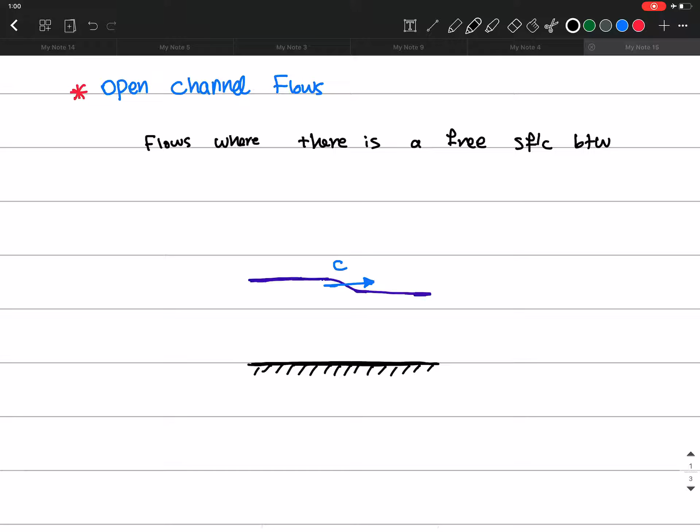Hello everyone. In this lecture, I'm going to start the open channel flows section. Open channel flows are flows where there is a free surface between the liquid and the gas, or water and air. These are mostly the fluids we investigate in civil engineering. For example, when you have a channel or a flume, this is where we have a free surface, a free interface between the water and air. So this is the definition of open channel flows: flows that occur in open channels, where the top of the channel is just removed, and we have a free surface between air and water.

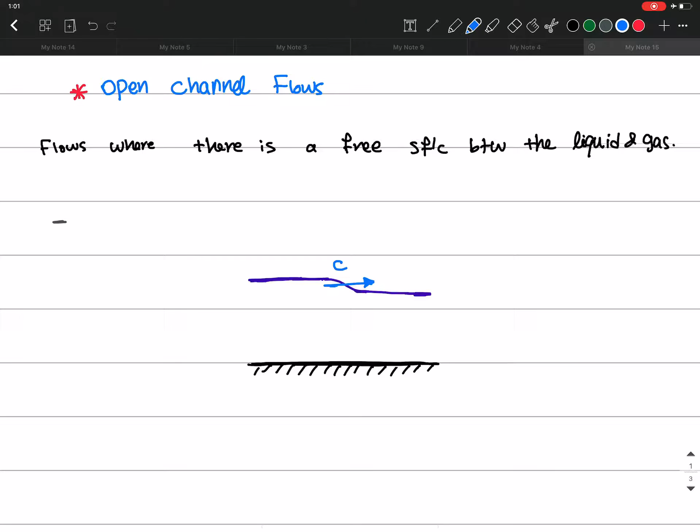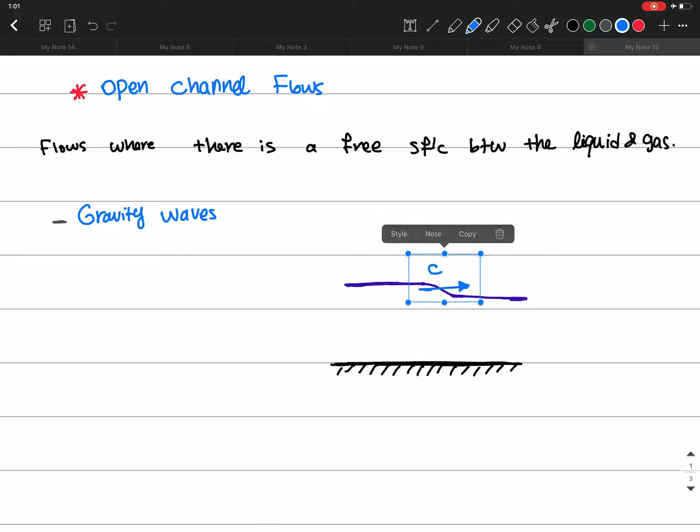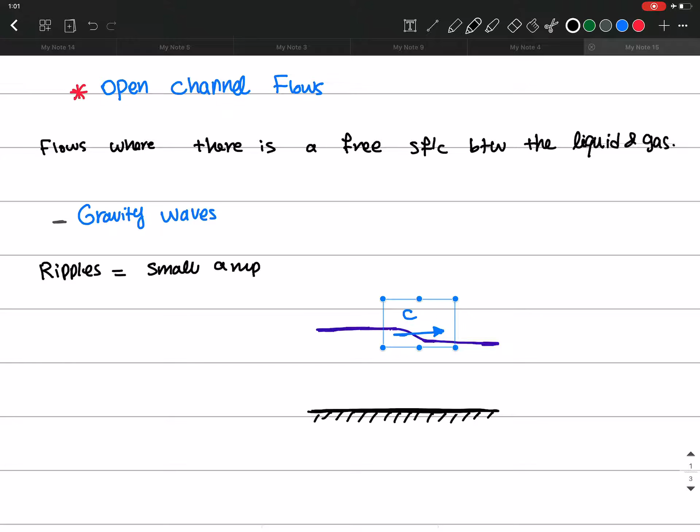So the first thing I want to investigate in these open channel flows is what we call gravity waves. And in particular, I'm going to focus on ripples, and let's see what ripples are. Ripples are small amplitude gravity waves, so we only focus on these small amplitude waves.

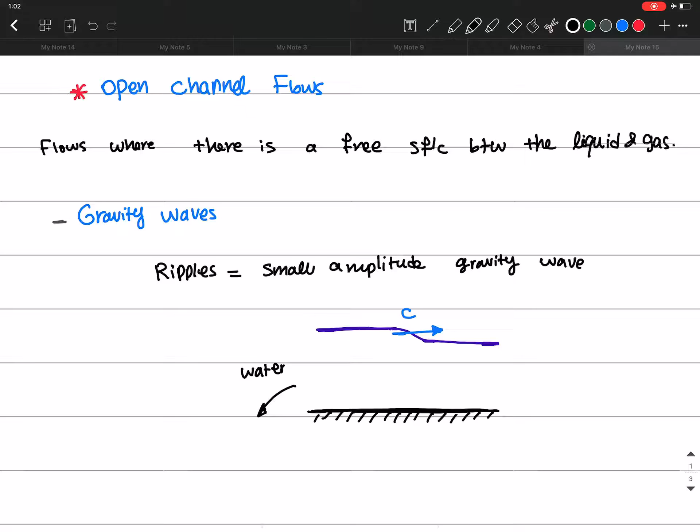So here, for example, you can see we have water. At the left, we make a small disturbance in a channel, in a shallow open channel flow. We have water on top of the channel, the velocity of it is 0, it's steady. And then suddenly we make a small disturbance in this shallow open channel flow. The disturbance could be, for example, you put a stick here and just shake it, or do some disturbance.

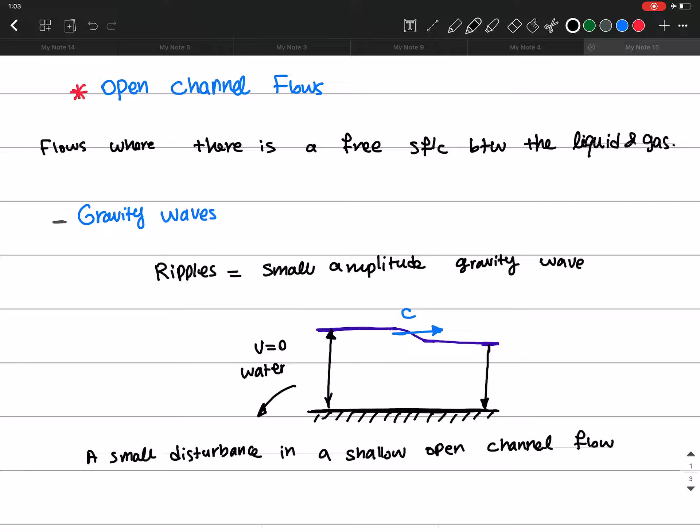So what happens by the disturbance is that a ripple is formed, and this ripple moves toward the other side of the channel. Downstream of that disturbance, where it doesn't know anything about the disturbance yet, the depth of the channel is y, and upstream of the disturbance, the depth of the channel is y plus delta y.

And in ripples, because these are small amplitude gravity waves that are moving, the requirement we have is that this delta y, the amplitude of the wave, over the depth of the channel y, should be much smaller than 1. It's a small amplitude wave compared to the depth of the channel.

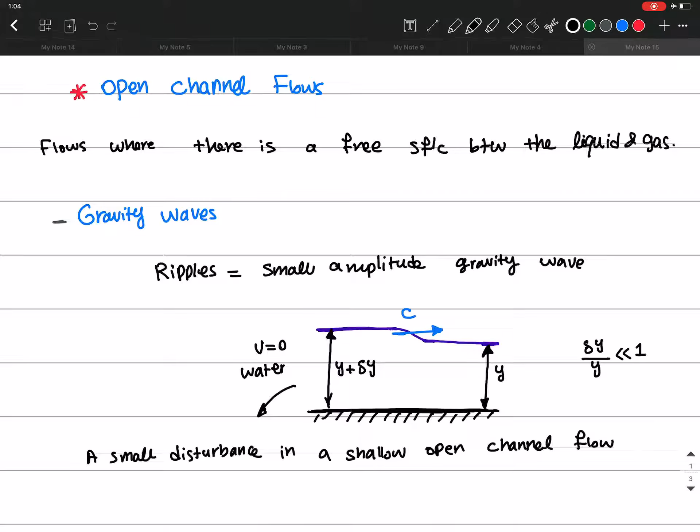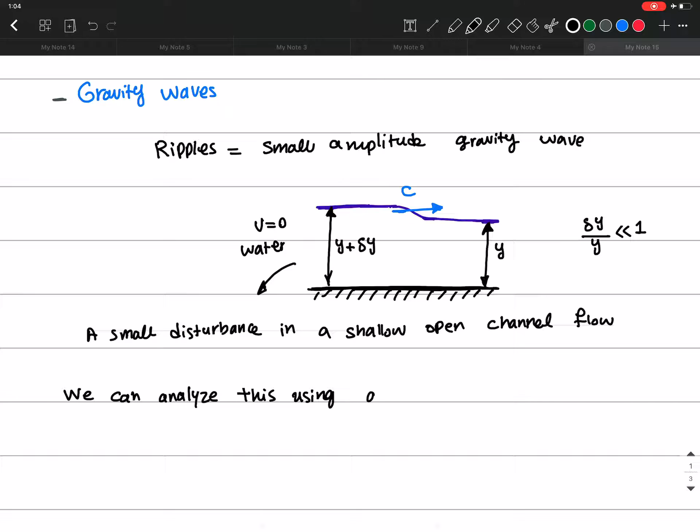So now we want to analyze this flow, these ripples, and see whether we can find a formula for the speed of the wave, this small amplitude gravity wave. We can analyze this using a control volume approach. Let's see how we can do this.

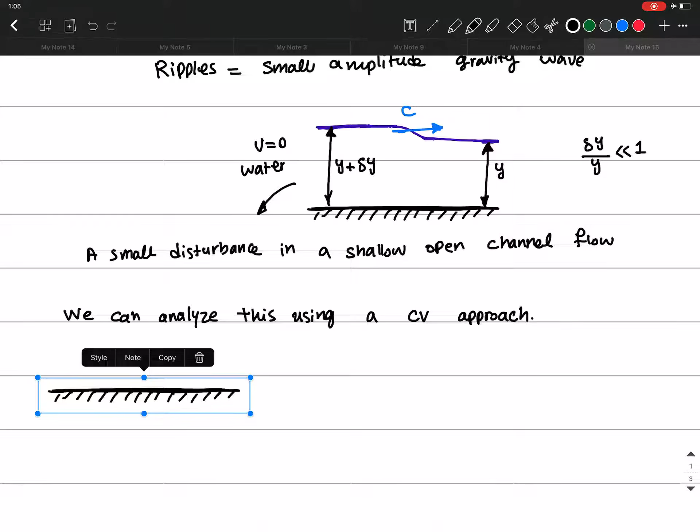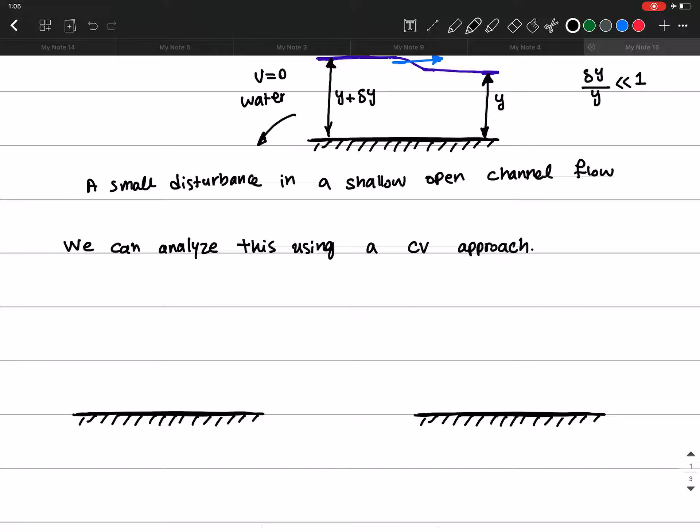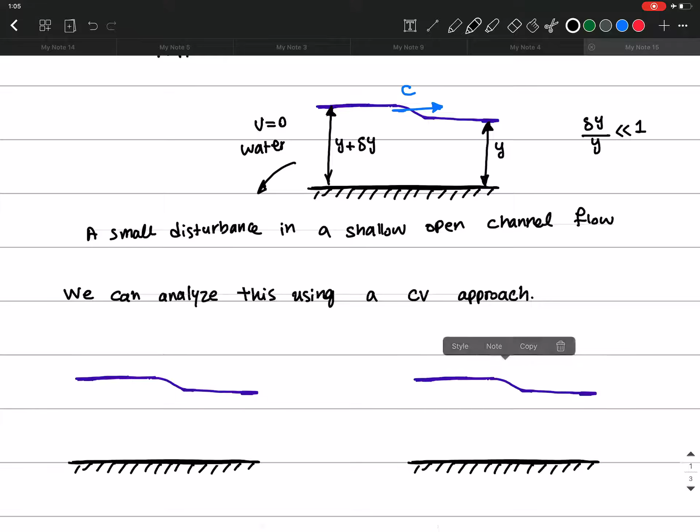So here we are going to use an innovative approach. I'm going to talk about the way we are going to analyze this, and the control volume that we are going to consider. First, I'm going to talk about the traditional way of doing that, and then a new way we are introducing here that simplifies our equations.

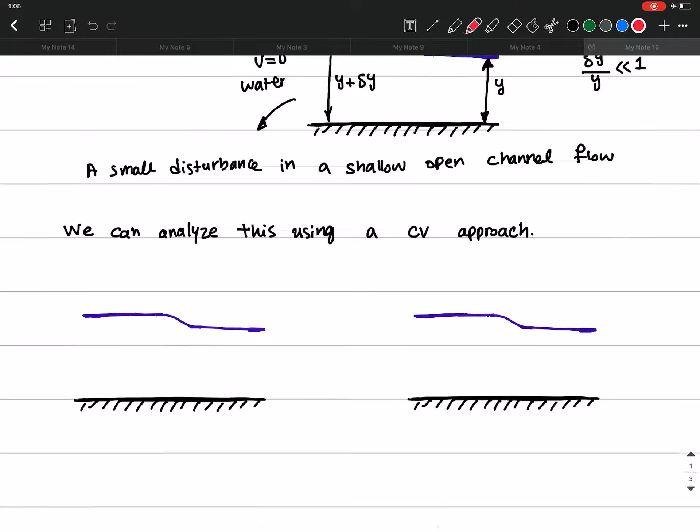So in the traditional approach, what we would do is consider a fixed control volume in space, steady, time invariant. This is our control volume. Here we have y plus delta y, and here the depth is y.

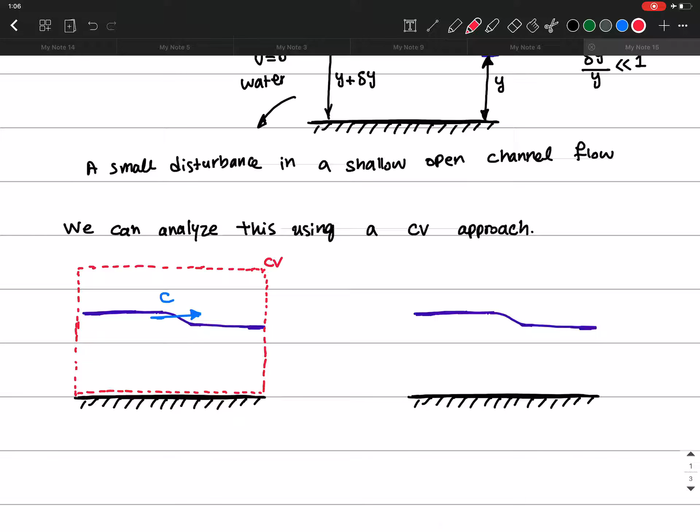So the velocity at this section is 0, right? Because the flow is not feeling anything about the disturbance. However, here we might have some velocity because of this disturbance, which we call delta V. This is known as drift velocity.

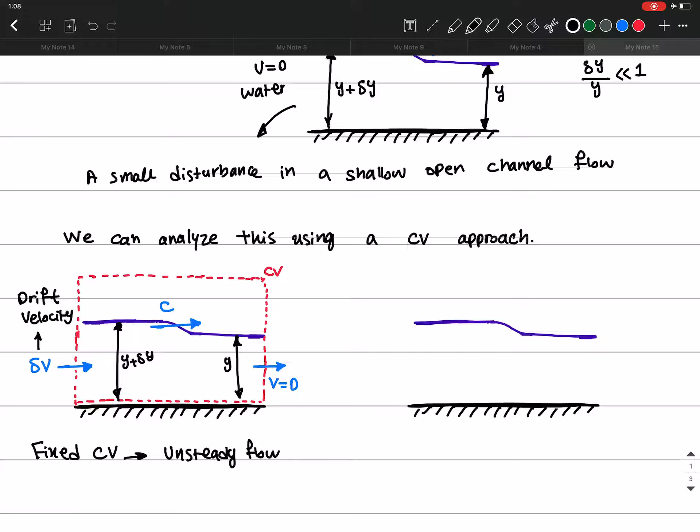So this is a kind of traditional control volume. Here we have a fixed control volume in space, but the flow is unsteady, it's moving inside this control volume and changing its shape. We know that this drift velocity is typically much smaller than the speed of the wave.

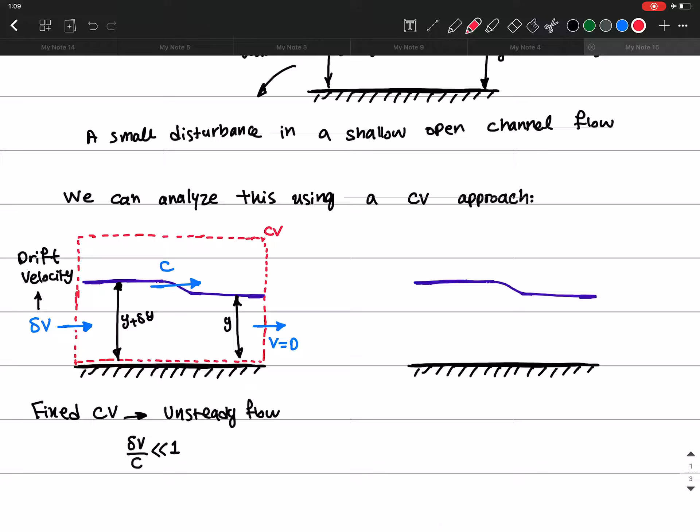So if you want to do this, because this is unsteady flow, it's kind of complicated, but we can simplify our approach if we define the CV differently. The way I'm going to define the CV is that we are moving with this wave. So this CV is not a constant CV, it's actually moving with the wave speed c. It's like you are on this wave, moving out over it, like an ocean wave that surfers ride. You are moving with that wave, and you want to form a control volume around yourself as you move with it.

So now let's see what's going to be the difference here. Again, these heights are not going to vary, it's the same height. So the things that are going to be different are velocities, because now we are moving with the wave.

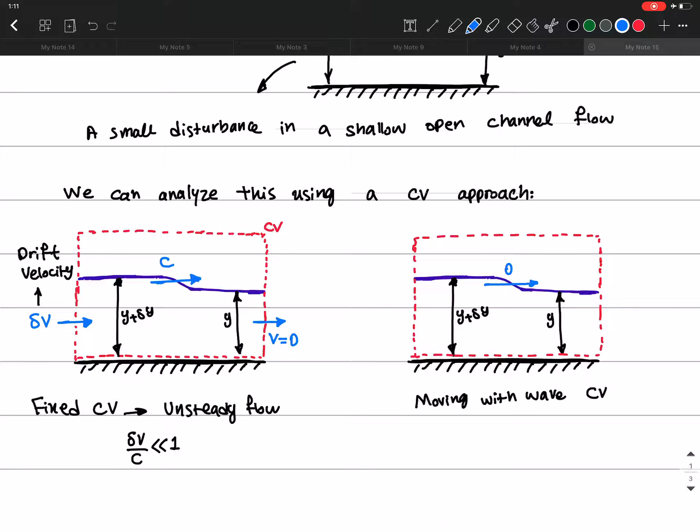So here, because we are moving with the wave, the velocity of the wave to us should be 0, right? Because we are in the reference frame where we are moving with that, so we are not actually feeling the velocity of the wave. But on the other hand, what we are going to observe is that the downstream of the flow is actually moving towards us. So here we have a V which equals C, right?

So it's not equal to 0 anymore, it's coming towards us. And on the other hand here, this is also going back toward the upstream, is kind of, we are leaving that, so it's like it has a velocity of C minus delta V. In other words, to simplify it, you just subtract C from all these velocities. So all the velocities that you have in a fixed CV, you subtract C, and then you are going to get these velocities here. To simplify that.

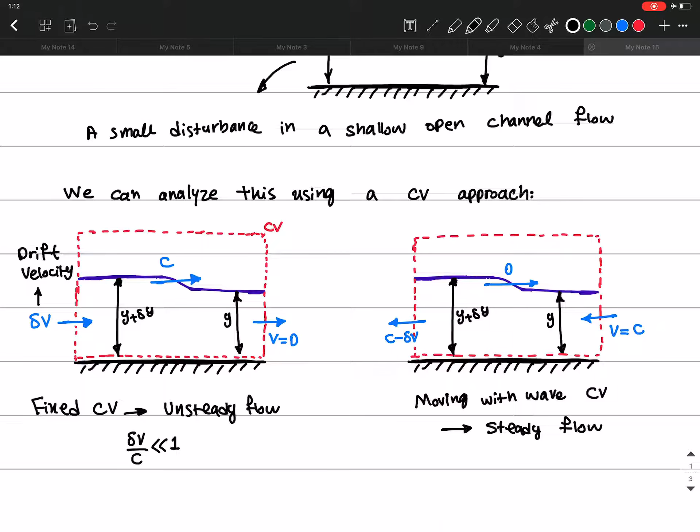Now, so we are moving with the wave CV. On the left, we had an unsteady flow, but now we are dealing with a steady flow, which is going to make our analysis much simpler. So the wave is stationary relative to yourself, but the water in front of the wave is coming at V equals C towards you.

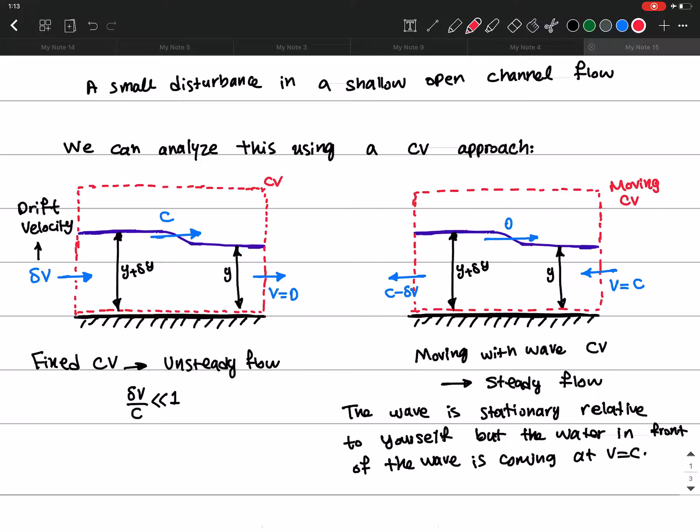Okay, so we are going to use this moving CV to continue our analysis. So I'm going to write the continuity equation first. So the flow that comes into this control volume should go out of this control volume. So the flow that comes in is here: C times Y, times the width.

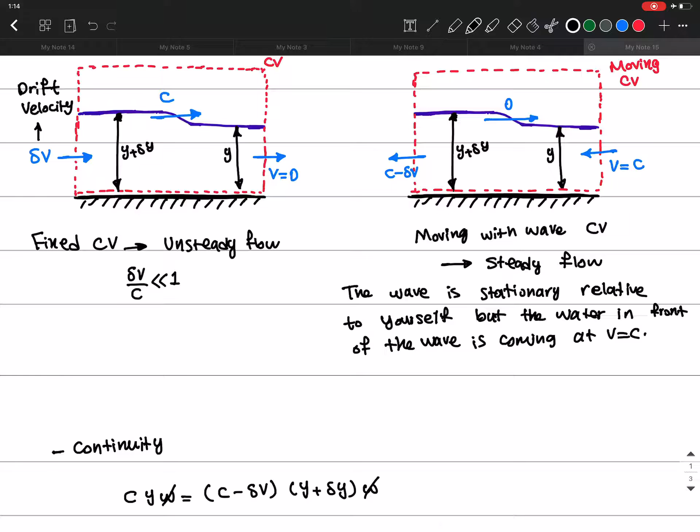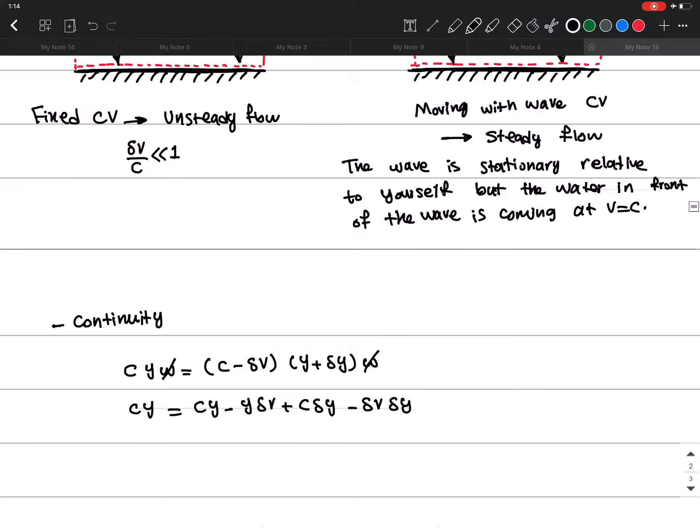We are going to assume that the width is constant, so I can write it down equals to the flow that goes out, so C minus delta V times Y plus delta Y, times again the width of the channel, which is constant here, so I can just cancel these two out. Then I can expand this, so I'm going to get CY minus Y delta V plus C delta Y minus delta V delta Y. And because these delta V and delta Y's are pretty small, if we multiply them, they are going to be even much smaller than the other terms, so I can assume that this is very small and equals to 0 compared to the other terms.

And also these two are going to cancel out. So what I am left with is this: Y delta V equals C delta Y. And this is what the continuity equation yields.

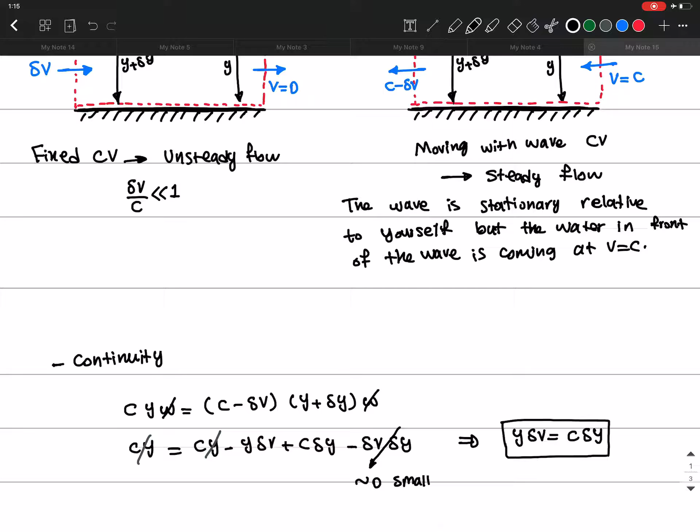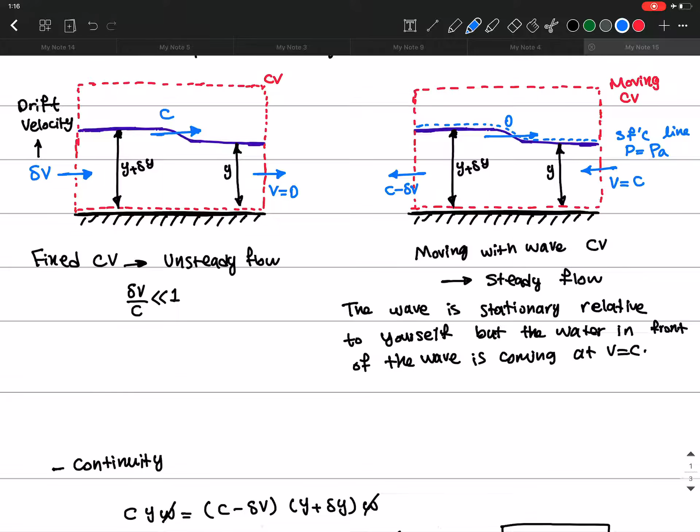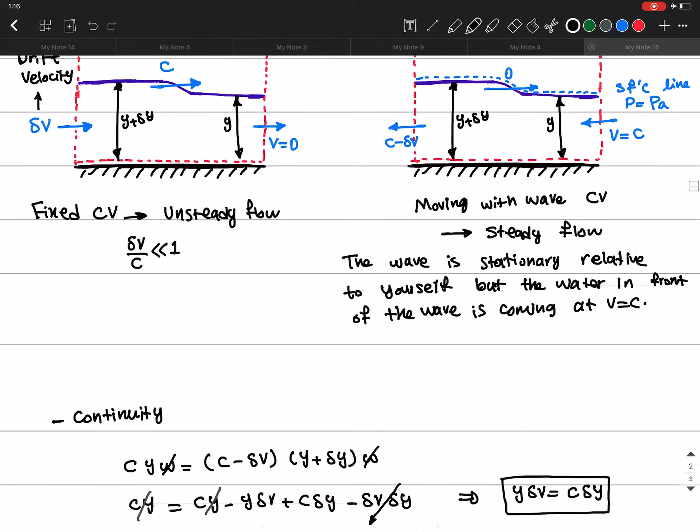So now let's write the other equation. Here, because we don't have any dissipation of energy, I can write the Bernoulli equation along the surface of this flow. Because this is the surface line, and along this surface line, this is in the vicinity of the atmosphere, the pressure here is just equal to the atmospheric pressure, PA, constant everywhere. So along that line, I can write the Bernoulli equation along the surface. So what we are going to get from section 1 and section 2 - say this is section 1, and this is section 2.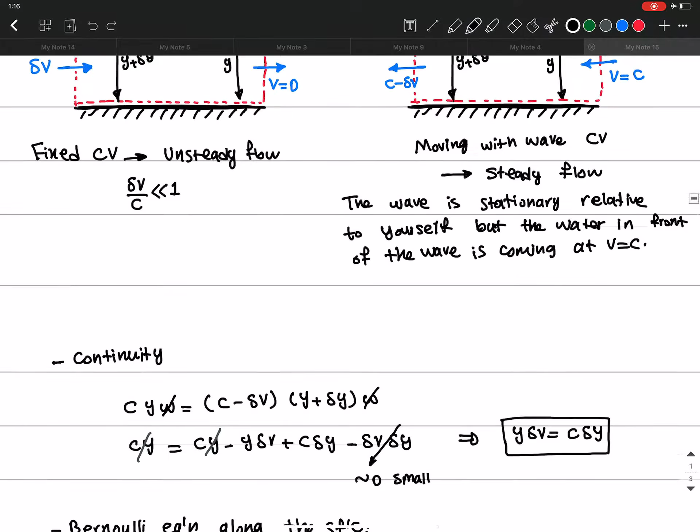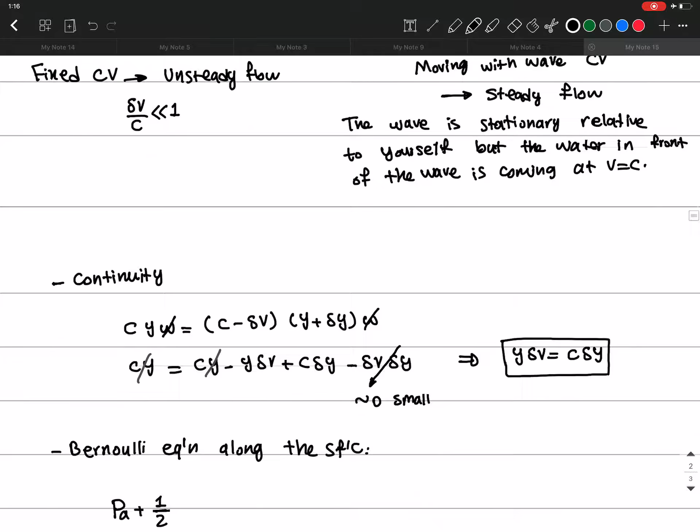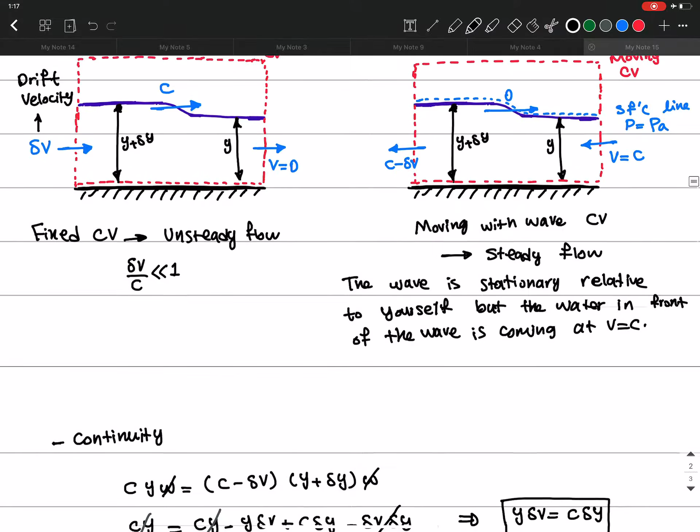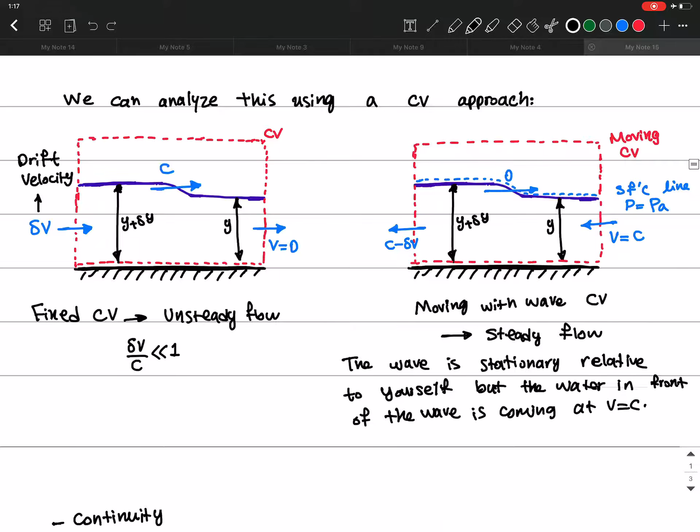So we are going to get PA, atmospheric pressure, plus 1/2 rho c squared, this is velocity here, plus rho gy. Because the flow is moving that direction, I can write it like this, so I can say this is section 1 and this is section 2. This equals to the atmospheric pressure at section 2, plus 1/2 rho times c minus delta v squared, the velocity here, plus rho g times y plus delta y.

So PA, atmospheric pressure, cancels out from both sides, and I'm left with these terms, and rho's also cancel out. So I'm only left with 1/2 c squared plus gy equals to 1/2 times c minus delta v squared plus gy plus delta y. So let's expand these: 1/2 c squared plus gy equals to 1/2 c squared minus 2 times 1/2 c delta v, which is just c delta v, plus 1/2 delta v squared, plus gy plus g delta y.

So these two terms, 1/2 c squared and 1/2 c squared, cancel out from both sides, and the gy's also cancel out. And this term, because delta v is very small compared to other terms, if you square that it's going to be even much smaller, so I can just neglect this, it's about zero. So what I get from the Bernoulli equation is: c delta v equals to g delta y.

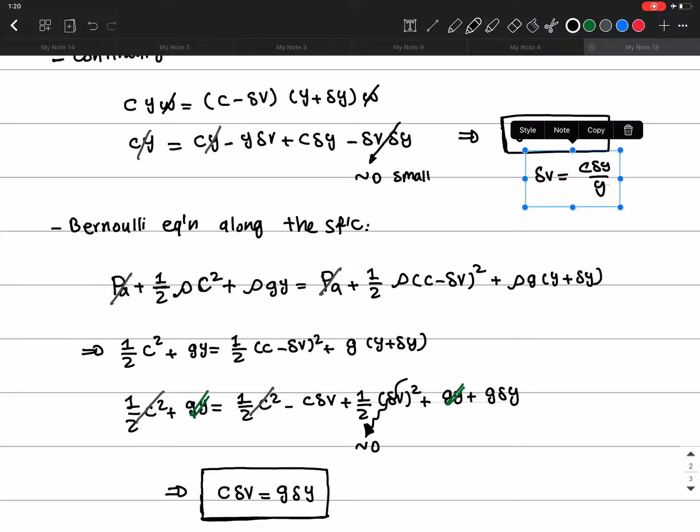So now we combine these two equations together. Instead of delta V, I'm going to write C delta Y over Y. So C times C delta Y over Y equals to G delta Y. So delta Y's cancel out from both sides, and we get a very interesting formula.

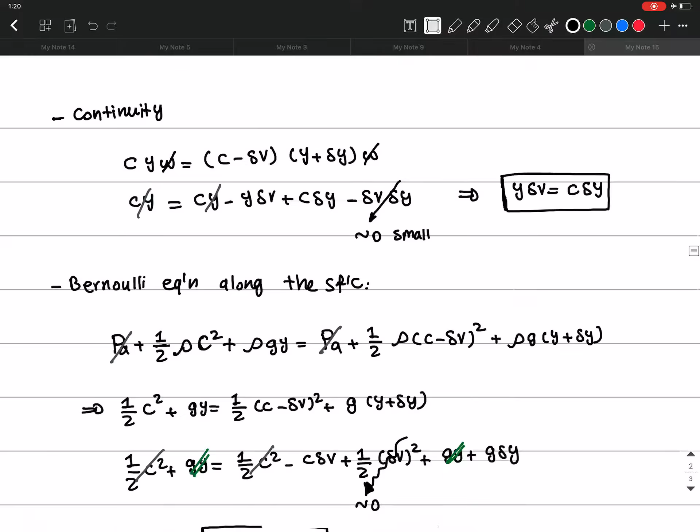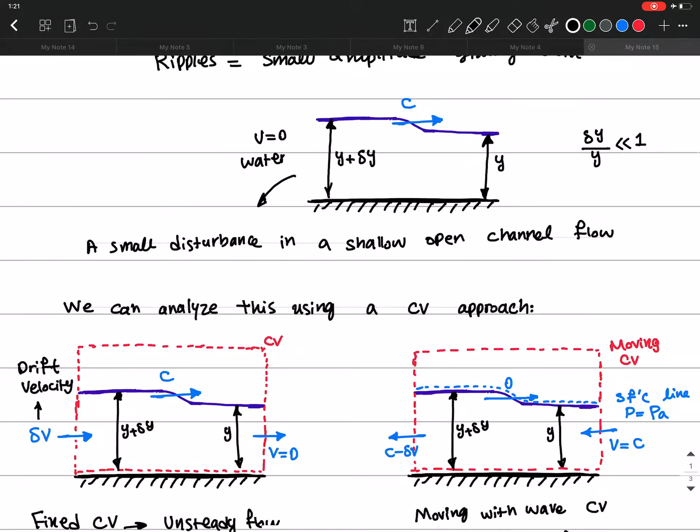Which is C squared equals to GY, or C equals to square root of GY. This is a very important formula. What C is, is the speed of this ripple, this small amplitude gravity wave. We were able to show that the speed is just square root of G, the gravitational acceleration, times Y, and that's why we call this a gravity wave, because it's driven by gravity.

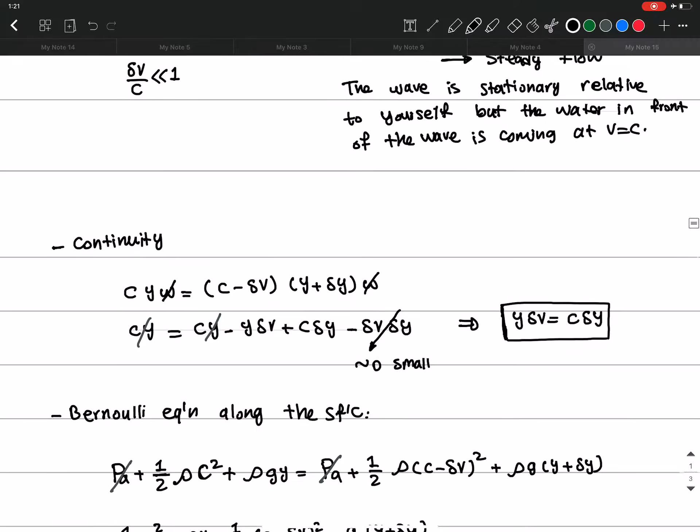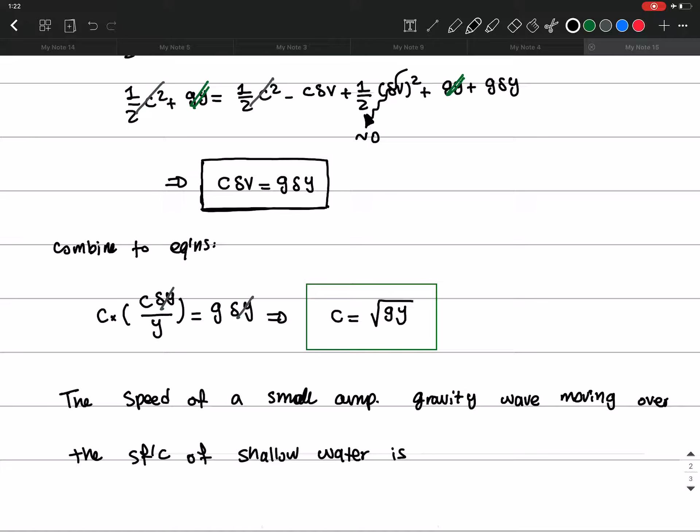So the speed of a small amplitude gravity wave moving over the surface of shallow water is square root of GY.

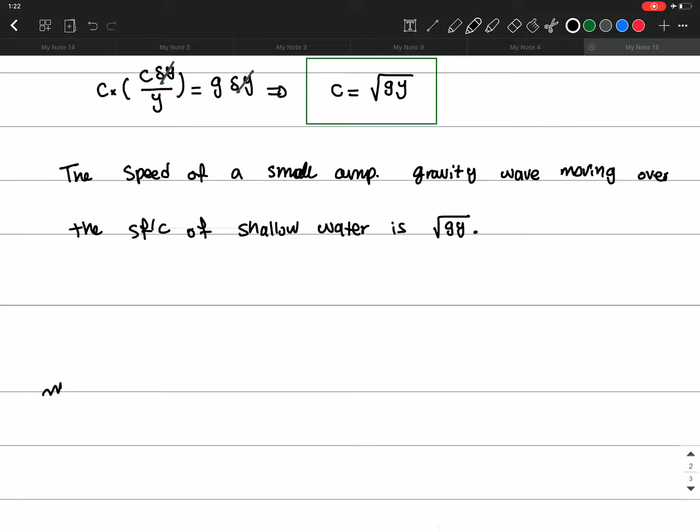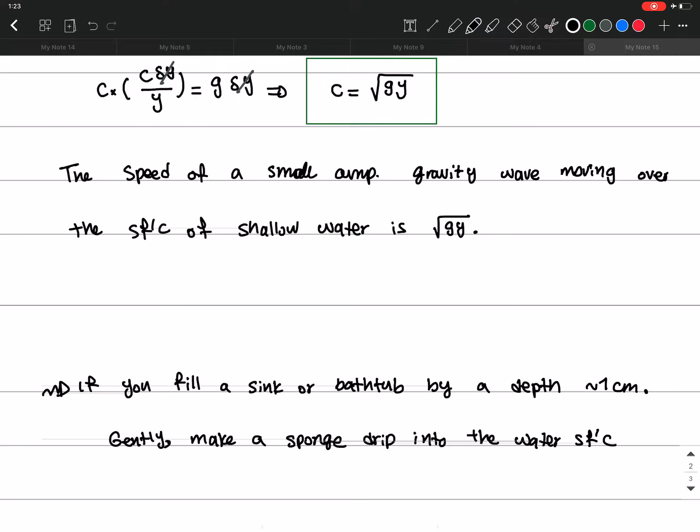You can actually measure this yourself and make sure you get the same formula. For example, if you fill a tank, or a sink, or bathtub, say to a depth of 1 centimeter, so it's kind of shallow water, fill that with water, and then gently make a sponge drip into the water surface. In this situation, you will see some circular ripples.

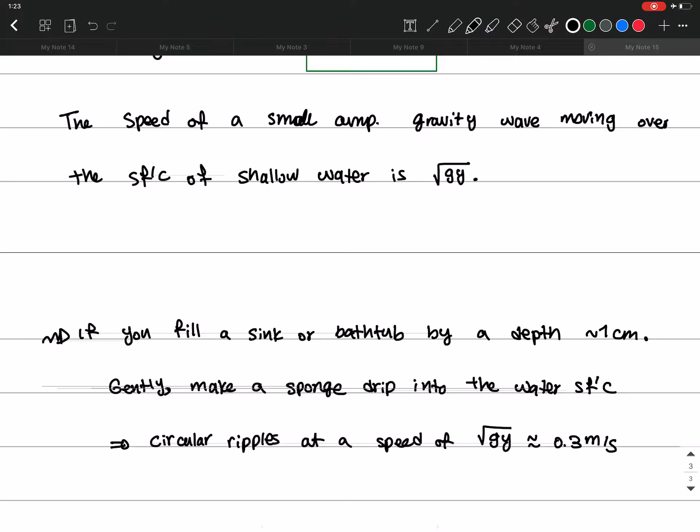Like even in lakes, you will see those circular ripples. These circular ripples move at the speed of square root of GY, which if you calculate for 1 centimeter is going to be around 0.3 meters per second. So you can actually measure this yourself and make sure this relation holds.

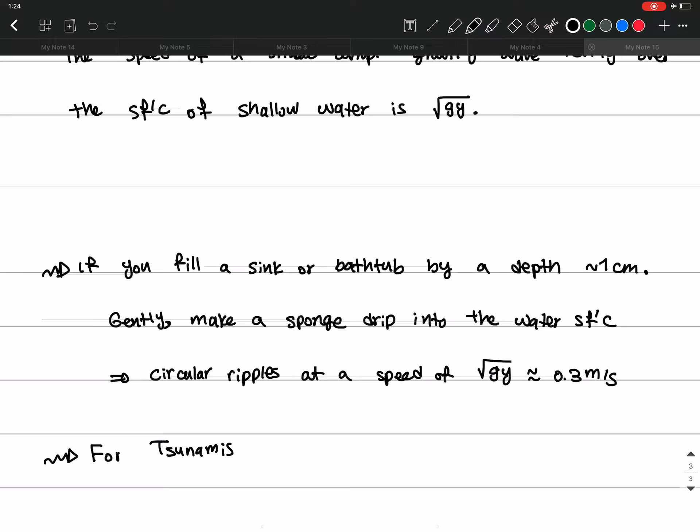Also for tsunamis, which are very large and dangerous gravity waves that occur because of some earthquake over the ocean, you can simply calculate the speed of that tsunami wave with this relation, square root of G, where we can assume it's 10, times the depth of the ocean. So you can say where the earthquake occurred, the depth of the ocean can be assumed around 4,000 meters, and this will give us a gravity wave speed of 200 meters per second. So tsunamis have very, very high speed and also high momentum as they approach the coast.

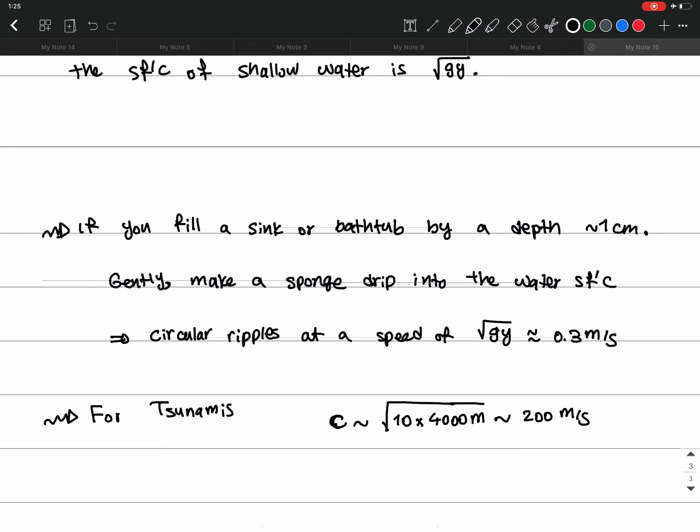Okay, so this was an introduction to gravity waves and ripples. In the next session, I'm going to talk about breaking waves and waves in a moving fluid. And then in the next lecture, we are going to talk about hydraulic jumps.